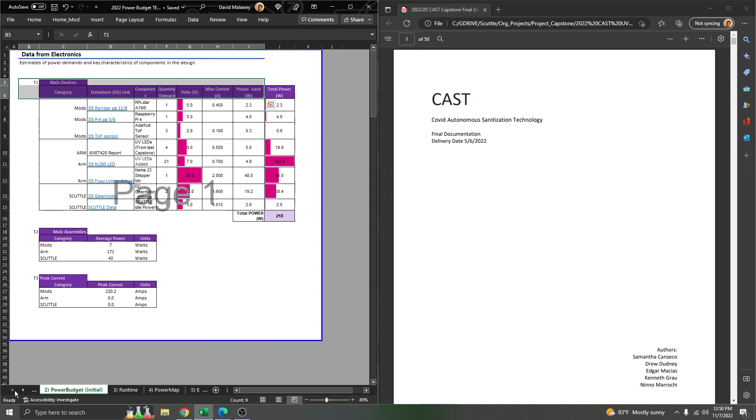So this is not a requirement. I don't think it's an explicit requirement, but the document itself in Excel should offer a nice template for you to start evaluating the power that you need for your battery, how much is consumed by each device, how to estimate the overall decisions you need for selecting wires and configuring your software, how to run your project for any larger than embedded system mechatronics assemblies.

So let's just do a quick walkthrough. I won't explain everything, but I'll give an introduction. Basically, the first tab on this spreadsheet is talking about what are the goals that you should be considering when you're making your power budget. It kind of explains why you would want to make a power budget.

And when you start answering all these questions for yourself, then you can discover a little bit more clearly what estimates and what level of detail you need to go into to actually serve your own purpose, whether that's for supporting your electrical designer or supporting the person that's making the report on the specifications, looking out for your final demo, etc.

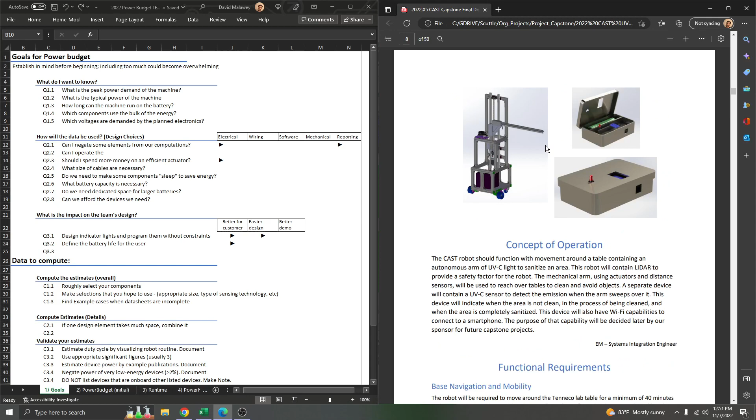The example used for this document itself is from the CAST team that was taking the Scuttle robot and creating a COVID-related sanitizing machine and all the mechanical and electronics associated with that. And so their system included an extra battery, a couple of extra sensors, and an actuator, a motor to move an arm up and down, and some powerful ultraviolet lights. We won't get into the sensor here on the right. That's for sensing the ultraviolet output.

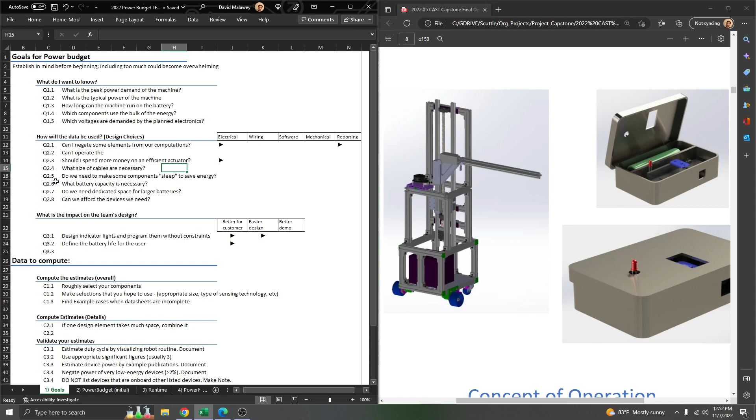So go through the goals and ask yourself what you need to know before you begin. Basically, it's starting a little bit more broad, like what is the peak power demand of your machine? And then it gets a little bit more detailed, such as what cable sizes are necessary. Some of these decisions are already made for you. You have to consider what your project includes and what are your constraints to decide which questions are really relevant. When you input data, you should really have clear answers for those versus skipping them.

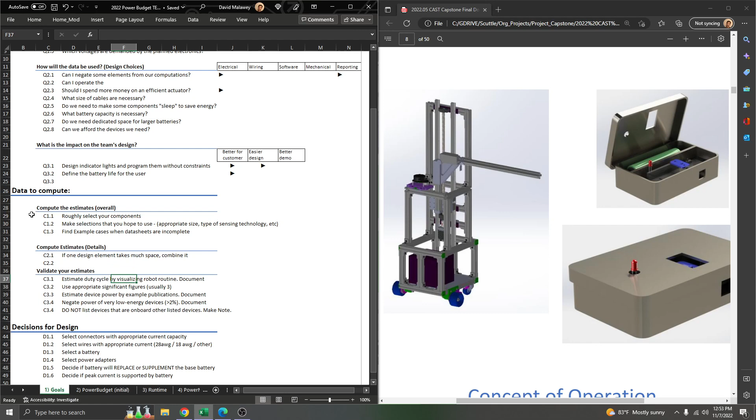Then we come down to what you're going to compute. You're computing estimates of the device's consumption individually. You're computing data that comes in from the outside, from like data sheets, and then estimates that you come up with on your own if you don't have the data sheets for every single thing or for your operating condition. You're going to consider logically how your estimates may be valid so that you don't run into trouble having a completely wrong power supply when you're ready to do your demo. And then the bottom section says, well, how will the above information impact your design decisions, such as selecting a battery?

So the following tabs are actually tabulated data, and we're going to do the normal view. So data from electronics. We're basically just capturing the key metrics that come from each of the components, the electronics, sensors, etc., that are included in the project or are planned to be included. We have modifications to the Scuttle platform that include a LiDAR. We have the elements on a moving arm that include ultraviolet LEDs and the motor that moves it. We have the Scuttle base machine and the general power consumption of that.

We look at how many of them are included, what is the voltage that they're operating at, and then essentially get the total power to know when they're all running full speed, what's the power consumed. And if you ran everything at 100% duty cycle, what would be the power demanded? Then we looked a little bit closer and break it into assemblies to say, okay, here's the power of each of our modules. That might help your designer who's addressing one module and the other designer who's addressing another.

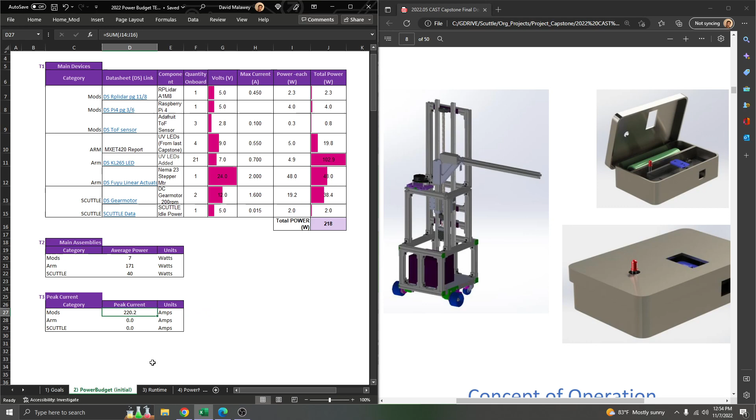Then we have the peak current. This is going to help you with other decisions in your design, such as wiring and connectors, sizing, and selection of a power supply if you have an adapter. Next section is runtime.

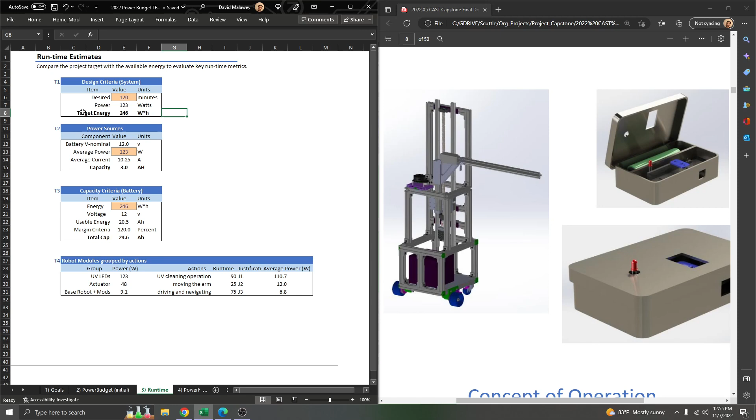Okay, so we want to start with our design criteria. Compare the project target with the available energy. This was driven essentially by battery size selection. How many milliamp hours do we need in our battery for a mobile machine to do such a task? So we can look at the desired runtime as a key input. Said, well, we want it to run for 2 hours. That's the invention we've been asked to make.

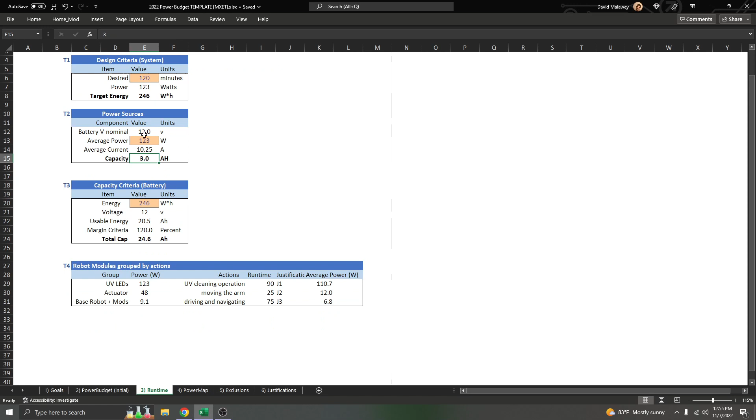What is the average power coming from the previous tab that we expect to be using during this runtime? And then how many amp hours will we need to support that based on the battery's nominal voltage? Then we come back to capacity criteria. How much energy is needed given this many amp hours and this many watts? Now we're talking about if you want to select your own battery, there's no battery included in the devices that you have brought into your project, and you have to choose that yourself.

Okay, well, if this is the voltage, then this is how many amp hours we need. And then you can design a battery or put batteries in series, etc. Then we have robot modules grouped by actions. This table steers us towards having decisions on how we're going to run the robot.

Well, sometimes we will have our actuator assembly operating, and it's doing that when it's moving the arm. It'll move the arm 25% of the time. This is a ballpark idea before you go too far into your project. Then we say the power of that movement is this much, because the motor is the only item running during that time.

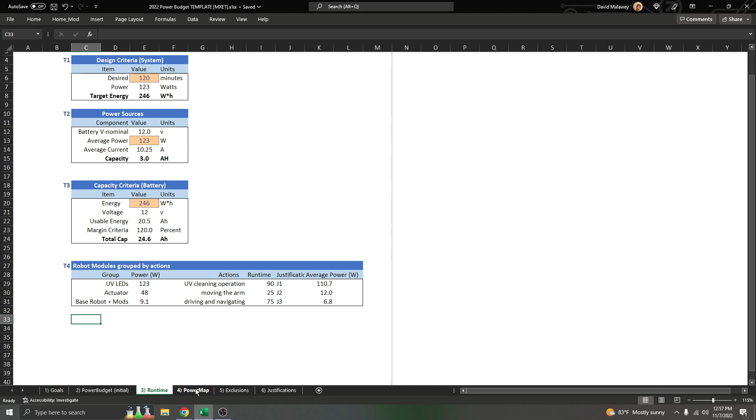So now we've broken down the power in a different way that says different conditions based on the sequence that your robot or your machine is operating. That's very driven by the task of your machine. Okay.

System power map. We have different power sources. There's only one power source that's driving the whole system, but if you look deeper, the converter, which pulls power from the battery and only feeds certain electronics, is a power source as well. And so it can deliver a certain number of amps, and there will be certain devices that are connected to the 24-volt output, not all of them.

And so this table, or actually this whole page, is to help us understand and decide, do we have sufficient power at each power source, not just at the battery overall. So here we have an example where we did a conditional formatting. The converter needs 8 amps, but our first battery selected only can provide 6 amps, and so this value comes out to a negative number. It's the only one that's negative.

It'll be yellow if it has a small margin relative to the others. And then we should make a note and decide what to do about it. And you can put your notes here if you want to organize your design process in the same way.

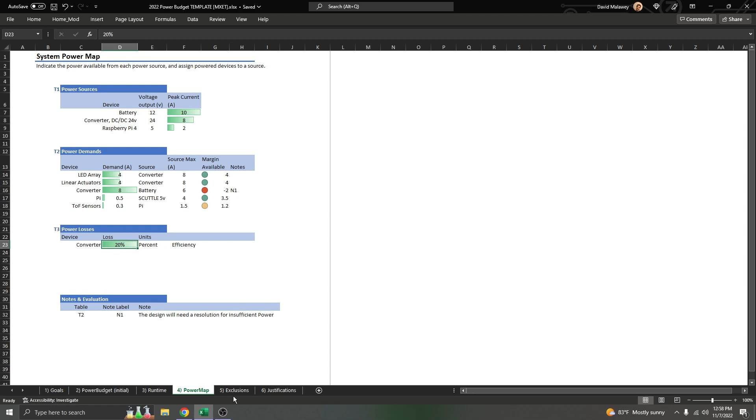Then we have power losses. This is going to be more filled out, but basically an example is the converter that gives us 24 volts. It loses a lot because boost converters lose a lot. If you get an expensive one, you could maybe get it 90% efficient. But the Amazon types are closer to 80% efficient. Next tab.

All right, power exclusions. This tab is only relevant for teams that found they have a cluster of elements that ought to be excluded from the power budget, to make it simpler and easier to evaluate, because, for example, on their sensing and indicating array, all of the power consuming devices are in milliamps. So there's two possibilities. One of them is you're looking at these LEDs and you say, well, we'll just negate this from all our computations because it won't have an impact on the project.

Or you can say that these devices are all pulling power from a specific source, such as the Raspberry Pi, and when the Raspberry Pi outputs to its 5 volt source at the USB ports, that has its own limitation. This table can remind you to go back into the data sheet of the Raspberry Pi and check how much current you can actually drive from that device itself, since it's doing the job of regulating at 5 volts.

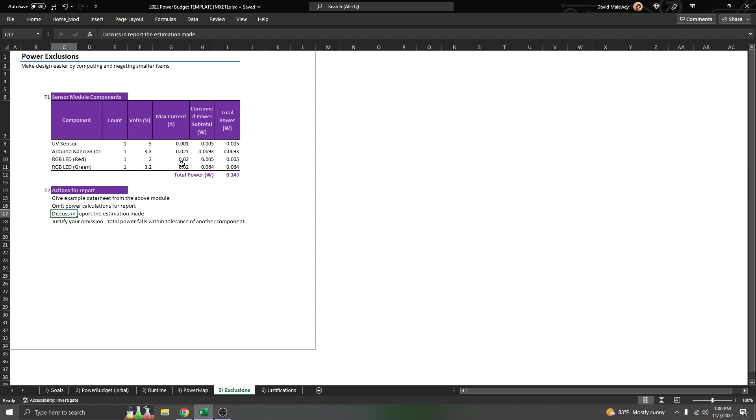Actions, this is a place for you to just make your notes about how this will have an impact, maybe a discussion about why something you estimated is not too relevant and you've omitted it from your overall final presentation.

Then justifications, this tab is a pretty rough draft, but I included the examples of a discussion that came from the Capstone team in fall of 2022, spring 2022, about how they made their decisions about duty cycle. And there will be other estimations that you want to make, not just duty as indicated in this column.

Then references also, these are ultimately going to find their way into your final document if they're relevant. But during the design process, you might have a nice list of bookmarks that you should be sharing with your other team members. You might toss them out at the end, or you might realize that you continue coming back to them, and they're really driving the explanation for your overall power evaluation.

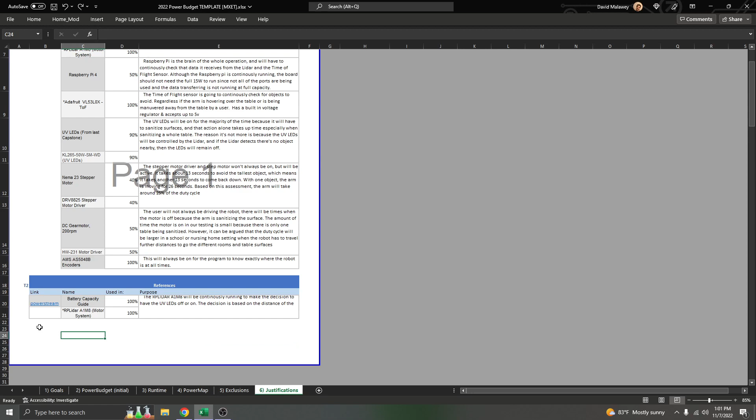So feel free to use this whole Excel spreadsheet. I strongly recommend thinking thoughtfully about the questions, so that you can trim back your work overall and only deliver in your deliverables the information and the calculations that really matter. And then you can set aside everything else simply by justifying it if you've thought of it, or if you haven't thought of it and it's not on this list, maybe you're going to be okay without it.

So hope that helps, and you can just talk to your professor if you need to get a copy of this Excel spreadsheet.